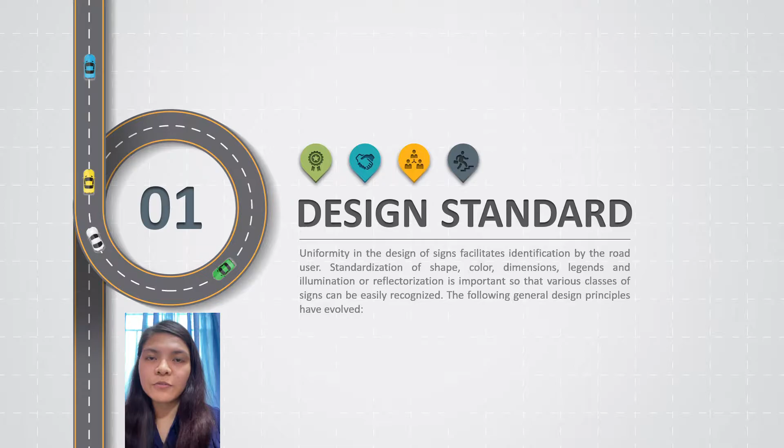For the first principle, the driver should not be unduly distracted from his task of driving by reading a traffic sign. If road signs aren't designed for the safety of road users, drivers can get distracted because it's hard to read the sign. That is why road signs must be designed for safety, so that they are easy to read and easy for road users to recognize.

For the second principle, a traffic sign should be perceived and understood by the driver traveling at the 85th percentile speed of the traffic on the road, in sufficient time for him to safely take any action necessary. So the sign should be visible and understandable to the road user at a certain speed so the driver can react or brake in time. Those are the 2 principles considered when designing a road or traffic sign.

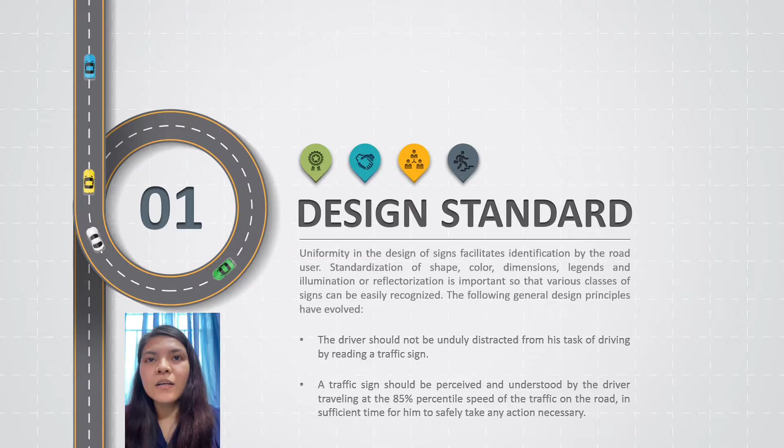Now we have the equilateral triangle with one point vertically downward, reserved for the give way sign. Here is the example of the give way sign. As you can see, it looks like an arrowhead pointing downwards, which is what 'one point vertically downward' means. It's reserved only for the give way sign.

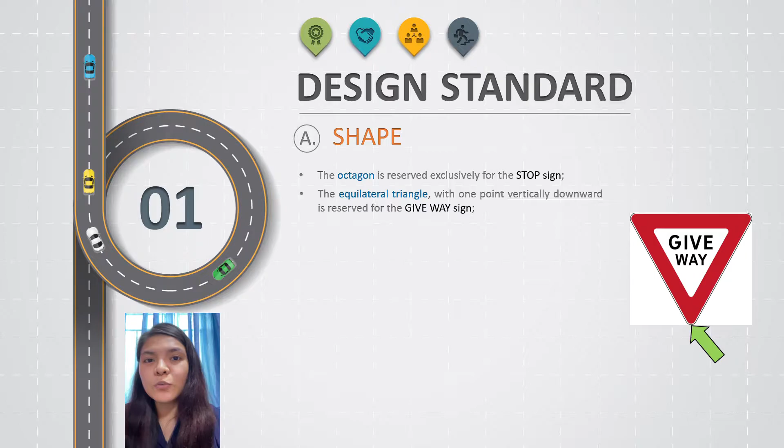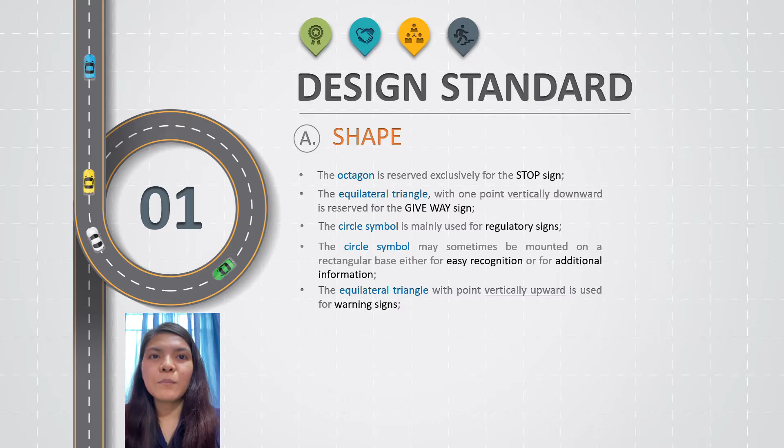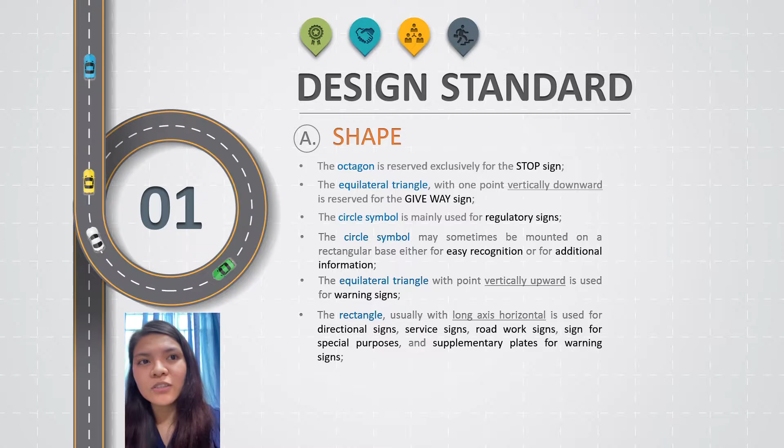Next, we have the rectangle, usually with long axis horizontal, used for directional signs, service signs, roadwork signs, signs for special purposes, and supplementary plates for warning signs. When we say long axis horizontal, it means the horizontal dimension is larger. For example, if this is the base and this is the height, then the base must be greater in value than the height.

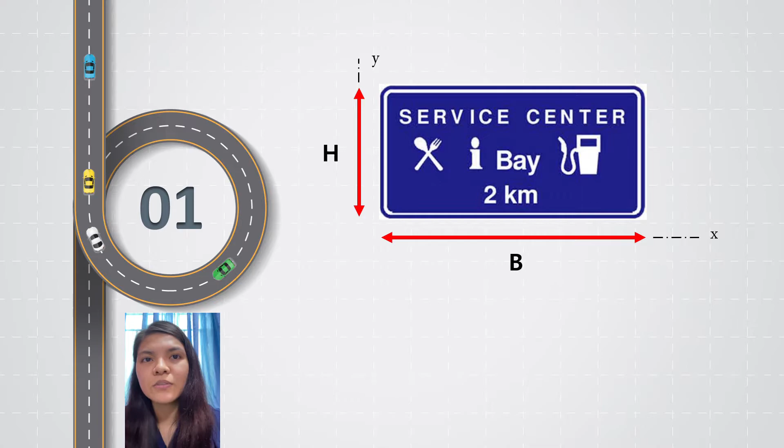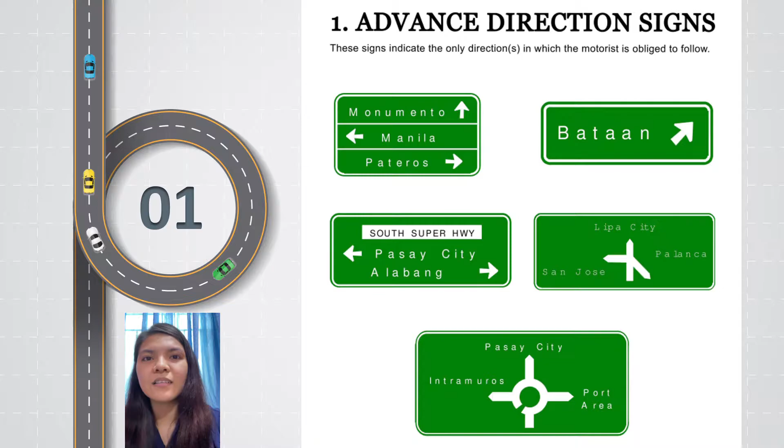Here are examples of the uses of that shape: advance direction signs, expressway service signs, and lastly the roadwork sign. We often see roadwork signs nowadays, especially since there are many road constructions.

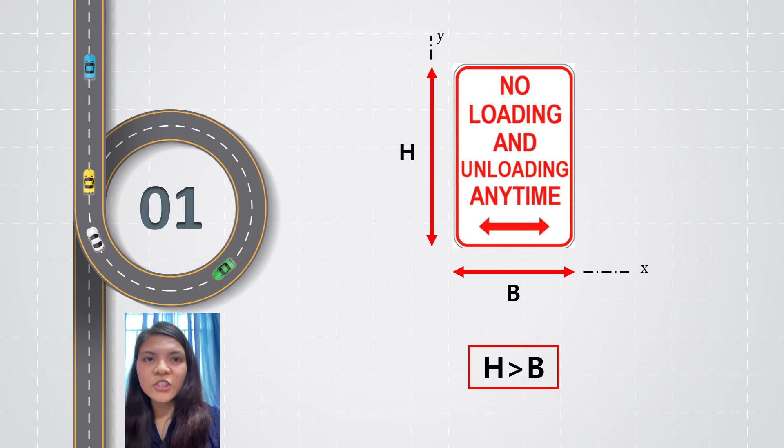These are the examples of that shape. We have different kinds of facility information signs like police station, railway station, repair station, hospital, eating place, and resting place, etc. You can see that all of these are rectangular in shape and having a larger vertical dimension.

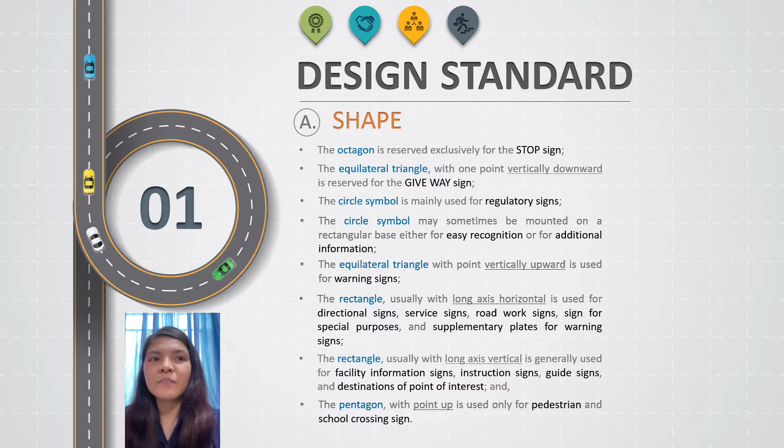Lastly, for the shape, we have the pentagon with point up, used only for pedestrian and school crossing signs. Here is the example. It has its point in the upper part, like an open envelope. And that is all for the shape.

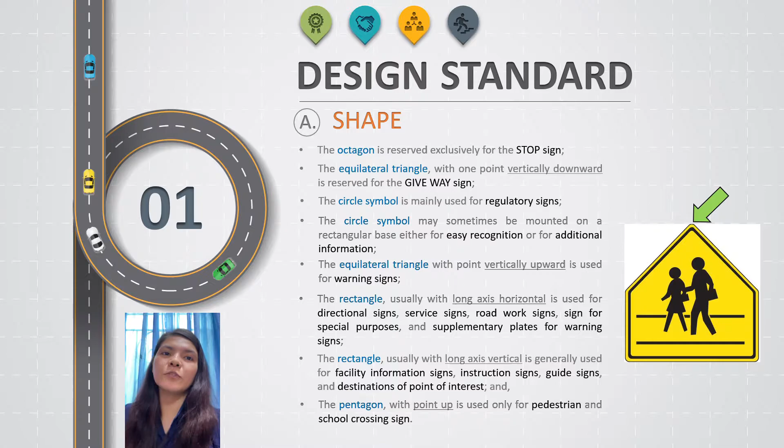Now we will proceed to the size. For the size, minimum dimensions will depend upon applications. The minimum dimensions required will vary depending on where the traffic sign will be used, especially since the shape of the traffic sign also differs - we have octagon, pentagon, circle, equilateral triangle, and rectangle.

Larger sizes are required for wider roadways and high-speed facilities. But for the most commonly used traffic signs, the dimensions are already specified, provided in the DPWH Blue Book. So if you are making a traffic sign, just refer to the DPWH Blue Book.

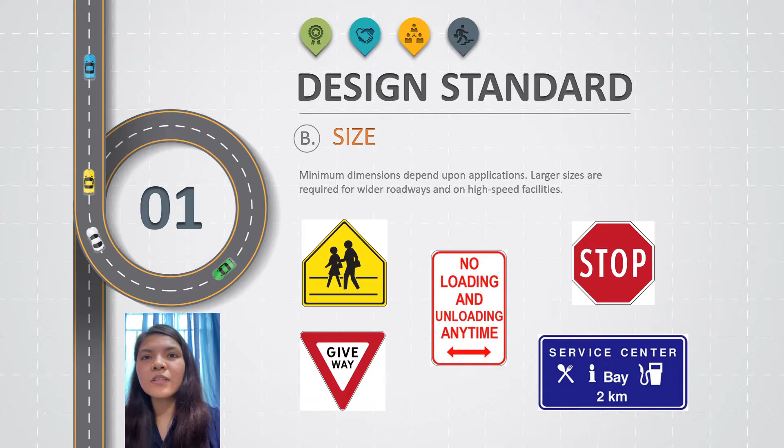We also have the design standard for color. The standard colors for signs are as follows: Red is used as background for stop signs, as border color on give-way signs, warning signs, and prohibitive signs in the regulatory type. Black is used as legend color for roadwork signs having white, yellow, or orange fluorescent background.

Yellow-green background, and as a chevron for hazard markers. Next, yellow is used as background color for roadwork signs.

White is the background color for most signs and legends for some colored backgrounds. Fluorescent yellow-green is used as a background color for signs related to pedestrian movement, school zones, and roadwork hazard markers, to give additional emphasis and guidance to vehicle operators.

Next, fluorescent orange is used as background color for roadwork signs whose legends relate to personnel working. Green is used as background color for direction signs. Blue is used as background color for service signs. Brown is reserved as background color for all tourist facilities, directional and information signs. And that's all for the standard color.

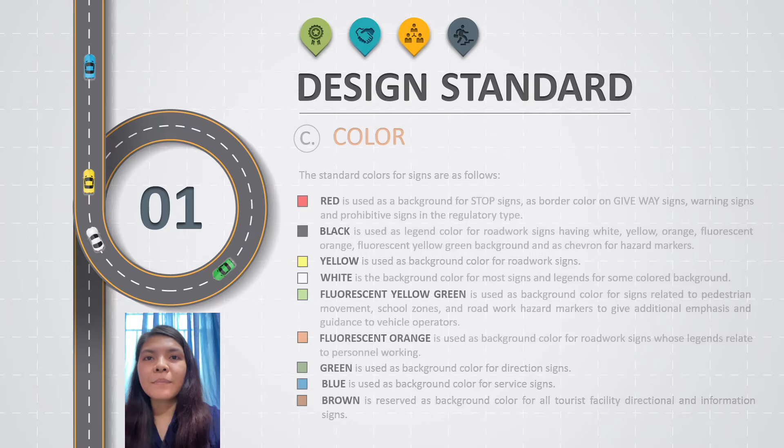Lastly, for the design standard, we have letter size. Recommended sign and/or letter sizes for most commonly used standard signs for use in various conditions are given in the DPWH Highway Safety Design Standard textbook. As I said earlier, the dimensions for most commonly used road signs are already specified, and here are examples obtained from the DPWH Blue Book.

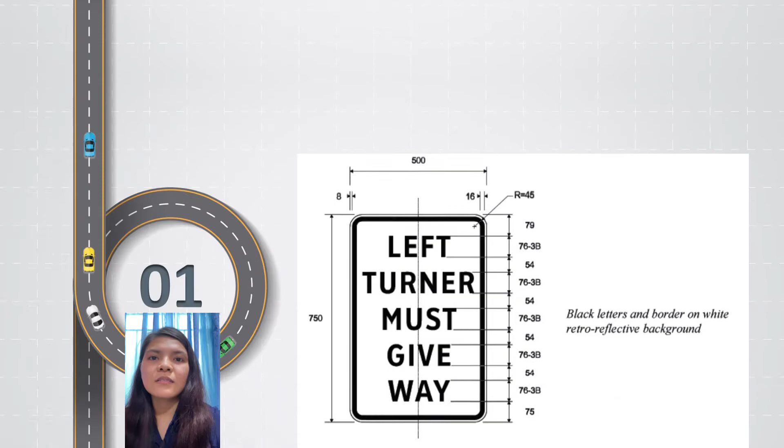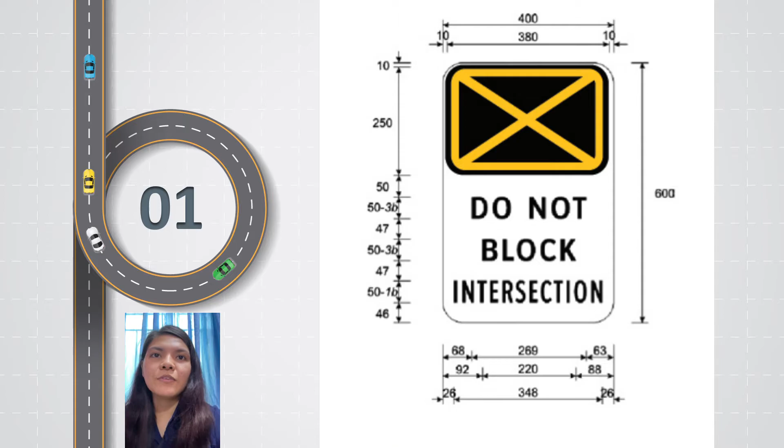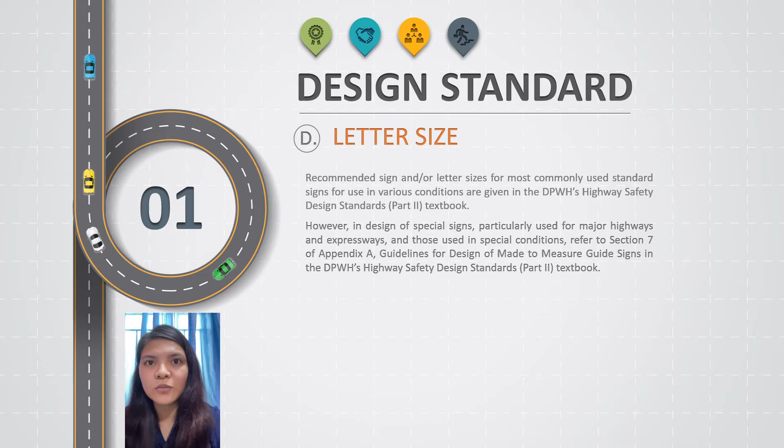However, in design of special signs, particularly used for major highways and expressways, and those used in special conditions, refer to Section 7 of Appendix A, Guidelines for Design of Made-to-Measure Guide Signs in the DPWH Highway Safety Design Standard Textbook. These are special cases that need customized traffic signs, so in that case, you should refer to the DPWH Blue Book.

There are many factors that need to be considered when making a road traffic sign. There is a provided formula for how to get the height of the letter, the width, the border, and other specific dimensions. The values also vary depending on the speed limit, width of the pavement, distance of the driver from the edge of the road sign, and so on. And that is all for the design standard.

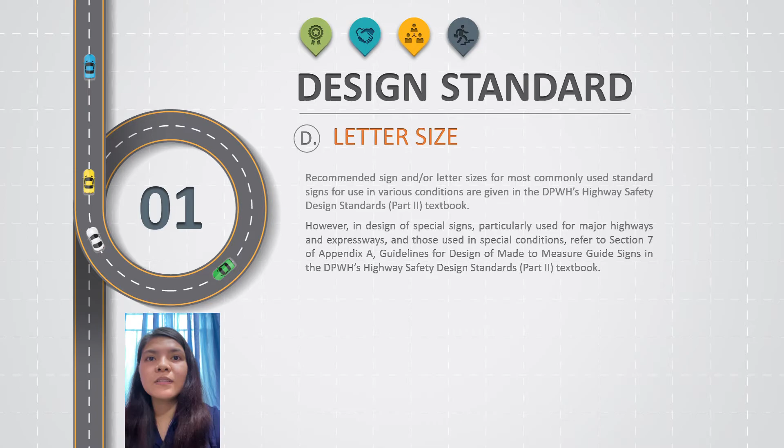Next, we will discuss the uniformity of locations. Signs are normally located on the right side of the road, right? But there are special circumstances where the signs may be duplicated on the left side or mounted over the road.

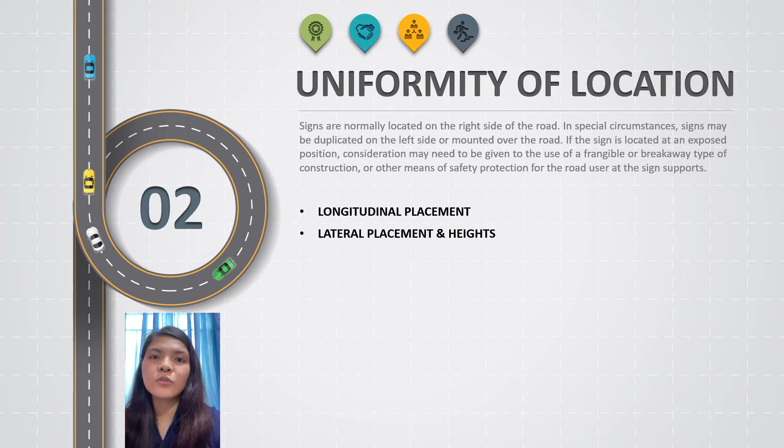So if the sign is located at an exposed position, consideration may need to be given to the use of a frangible or breakaway type of construction or other means of safety protection for the road user at the sign supports. And we have two subtopics under uniformity of location, which are the longitudinal placement and the lateral placement and heights.

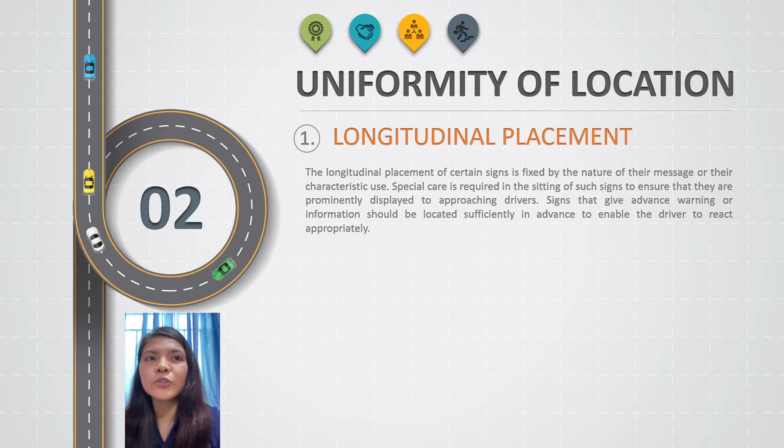So the longitudinal placement of certain signs is fixed by the nature of their message or their characteristic use. Special care is required in the siting of such signs to ensure that they are prominently displayed to approaching drivers. Signs that give advance warning or information should be located sufficiently in advance to enable the driver to react appropriately.

Generally, there should not be more than one sign of a particular type on each post, except where one sign supplements another, or where route or directional signs must be grouped. So where it becomes necessary to convey two or more different messages at one location, separate signs located at a minimum of 0.6V meters apart, where V is the 85th percentile speed in km/h, should be used.

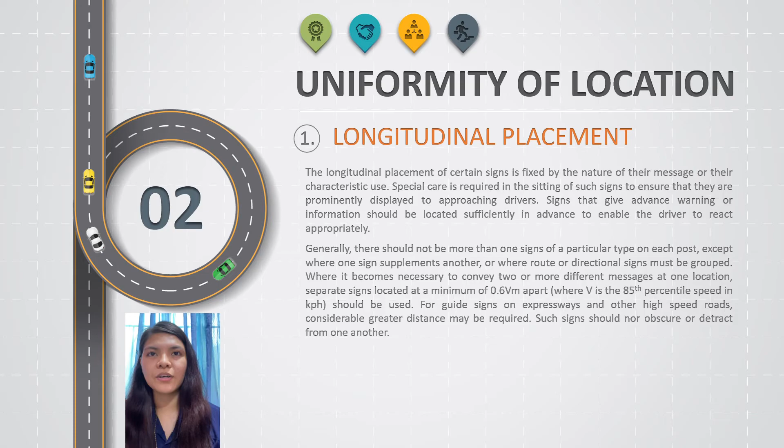For guide signs on expressways and other high-speed roads, considerably greater distance may be required. Such signs should not obscure or detract from one another. Next will be the lateral placement and heights. The following subsections are the general rules for the lateral location of roadside signs and for the mounting heights on roadside. The lateral placement is measured from the edge of the sign nearest the road and the height from the underside of the lowest sign.

The rules apply to permanent signs and include signs for roadwork and special purposes where these are mounted on posts set into the ground. Any variation in these rules for a particular sign is given in the rule relating to that sign. There are, however, exceptions where conditions do not permit these rules to be applied. In these cases, the placement or height is adjusted to meet these special conditions. For example, the height of a sign may be increased or decreased to avoid obstructing sight distance at an intersection.

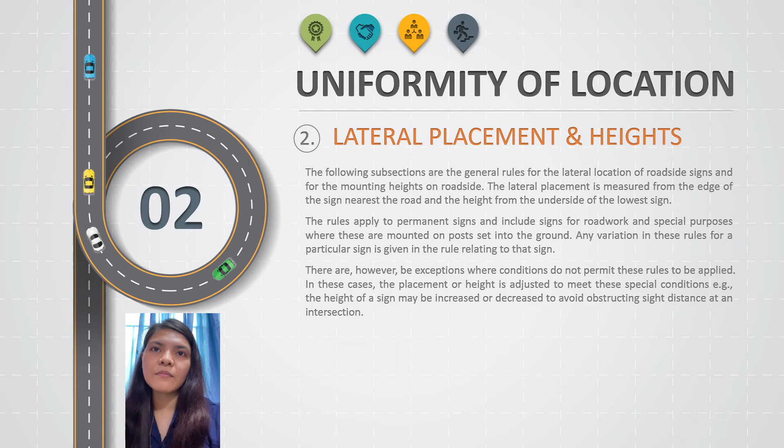Here we have the specification for lateral placement. On uncurbed roads in rural areas, the sign should be at least 600 mm clear of the outer edge of the road shoulder, the line of the guidepost or face of guardrail. The distance should not be less than 2 meters nor more than 5 meters from the edge of the traveled way, except for large guide signs on expressways, where greater clearances may be required.

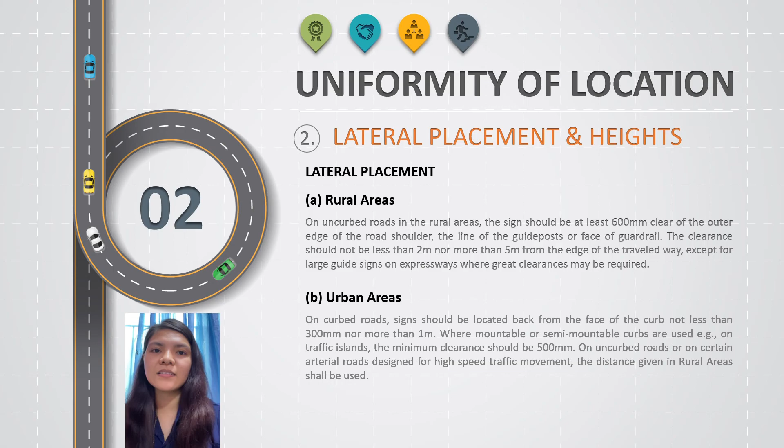In urban areas, on curbed roads, signs should be located back from the face of the curb, not less than 300 mm nor more than 1 meter. Where mountable or semi-mountable curbs are used, for example on a traffic island, the minimum clearance should be 500 mm. On uncurbed roads or on certain arterial roads designed for high-speed traffic movement, the distance given for rural areas shall be used.

And for the specification of heights, in rural areas, roadside signs should be mounted clear of roadside vegetation and clearly visible under headlight illumination by night. The height of the sign should normally be between 1 meter and 1.5 meters above the nearest edge of the traveled way. For fingerboards and intersection direction signs, the height should be increased to 2 meters.

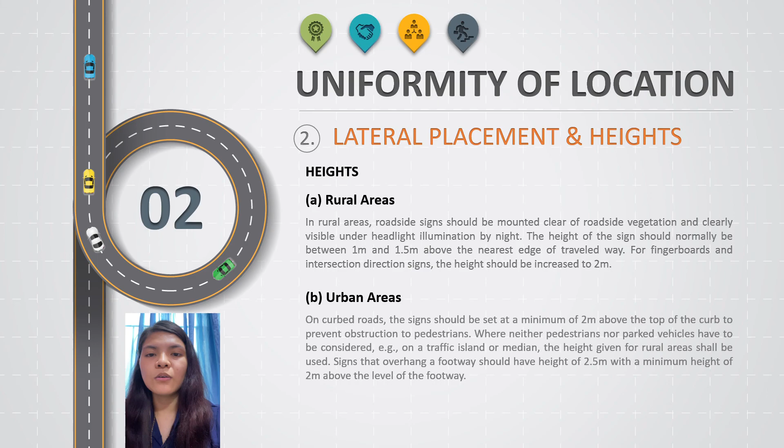And in urban areas, on curbed roads, the sign should be set at a minimum of 2 meters above the top of the curb to prevent obstruction to pedestrians. Where neither pedestrians nor parked vehicles have to be considered, for example on a traffic island or median, the height given for rural areas shall be used. Signs that overhang a footway should have a height of 2.5 meters, with a minimum height of 2 meters above the level of the footway. So that will be all for my report.